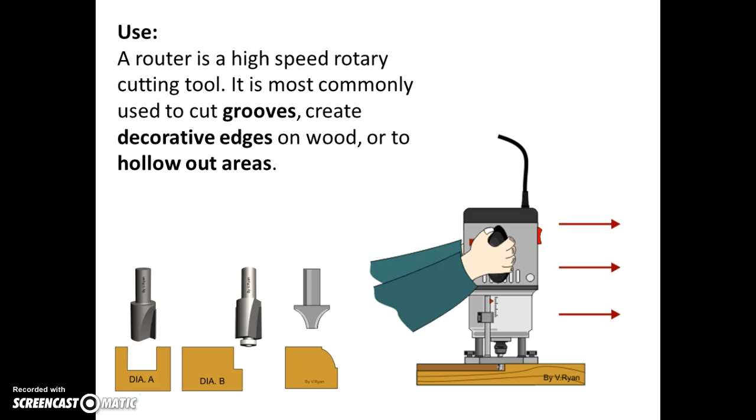Advanced tools and equipment: routers. Use. A router is a high-speed rotary cutting tool. It is most commonly used to cut grooves, create decorative edges on wood, or to hollow out areas. A router is a dangerous piece of equipment if you do not know what you are doing. As a GCSE or A-level student, you are considered old enough and mature enough to use the equipment safely.

Parts of a router. A router has two handles that should be held whenever the router is in operation. The router bit. The router uses the edge of its cutting bit, which rotates at speeds of approximately 25,000 to 30,000 rotations per minute, to produce a smooth cut. Variable speed routers can typically be adjusted to rotate at speeds of 10,000 RPM to 30,000 RPM.

Router bits come in various sizes and shapes, depending on the hardness of wood or other material to be cut, and the type of cut desired. The router bit can be raised or lowered to suit the depth of cut required.

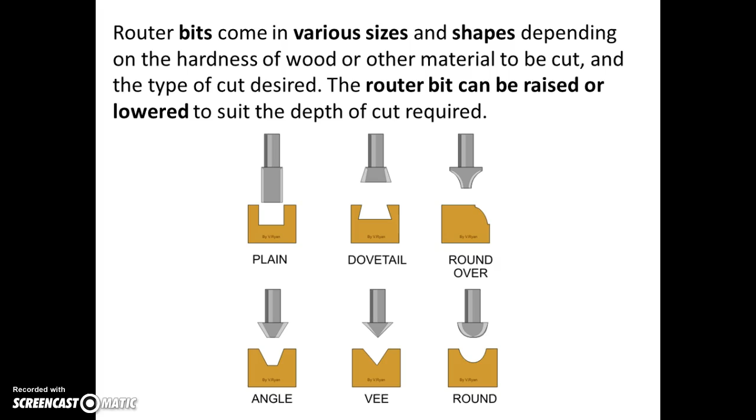Adjustable fence. The adjustable fence is used when routing in order to achieve straight cuts that are parallel to the edge of the material. The distance between the fence and the router bit is important, as this is the distance the groove will be from the edge of the material. Increasing the distance between the fence and the bit will make a groove further away from the edge.

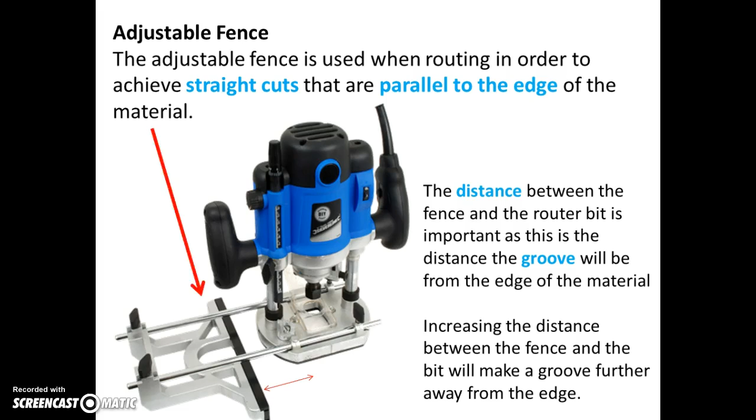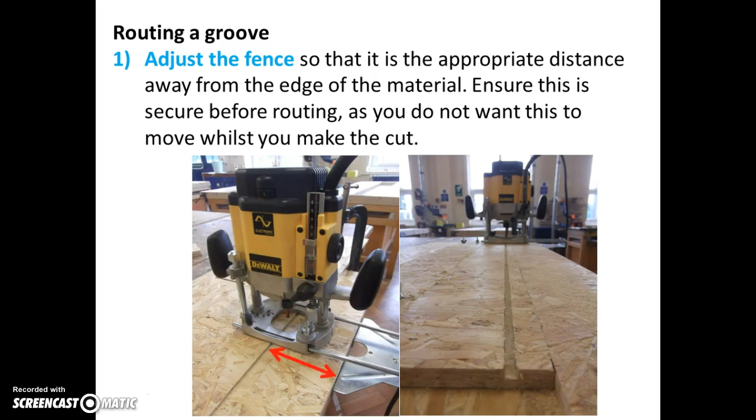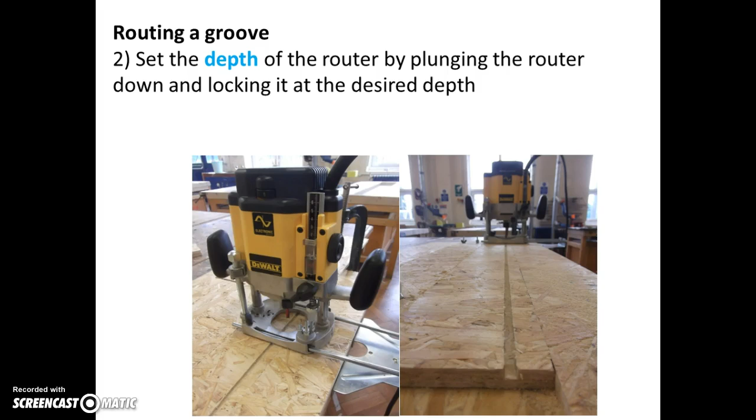How to use a router. Routing a groove. Step 1. Adjust the fence so that it is the appropriate distance away from the edge of the material. Ensure this is secure before routing, as you do not want this to move whilst you make the cut. Step 2. Set the depth of the router by plunging the router down and locking it at the desired depth. Step 3. Secure your workpiece in a jig or to a workbench so that it will not move when routing your groove.

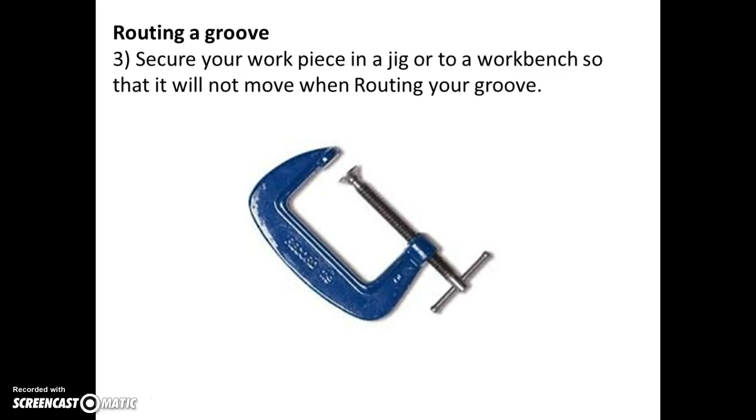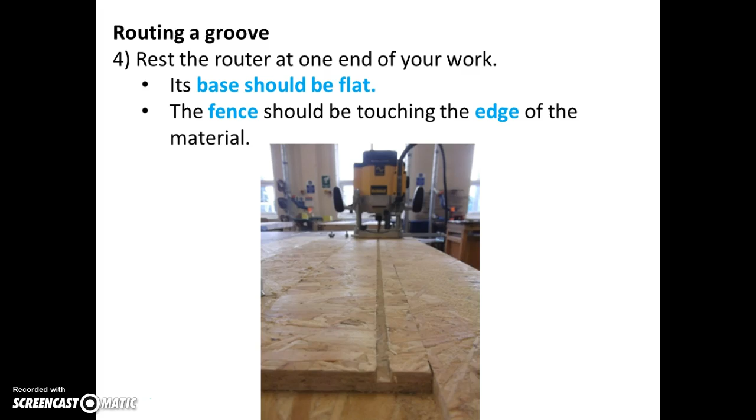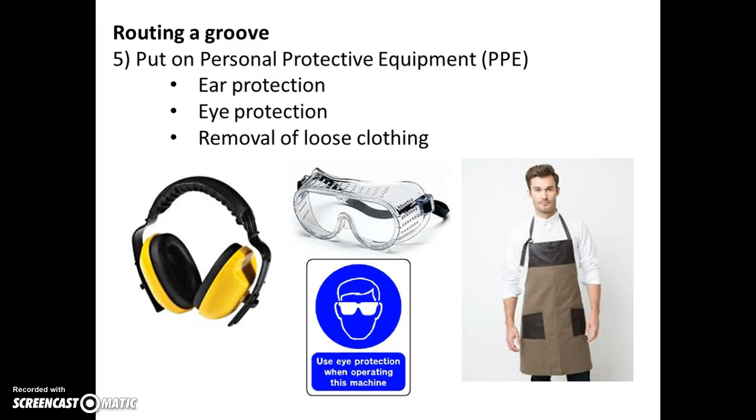Step 4. Rest the router at one end of your work. Its base should be flat and the fence should be touching the edge of the material. Step 5. Put on personal protective equipment, or PPE. Ear protection, eye protection, and removal of loose clothing should be done prior to using a router. Step 6. Plug in. Hold the router using both hands. Pass the cable over your shoulder so that it is out of the way. Move the router bit slightly away from your work before switching on the router to allow the router bit to get up to the required speed before cutting.

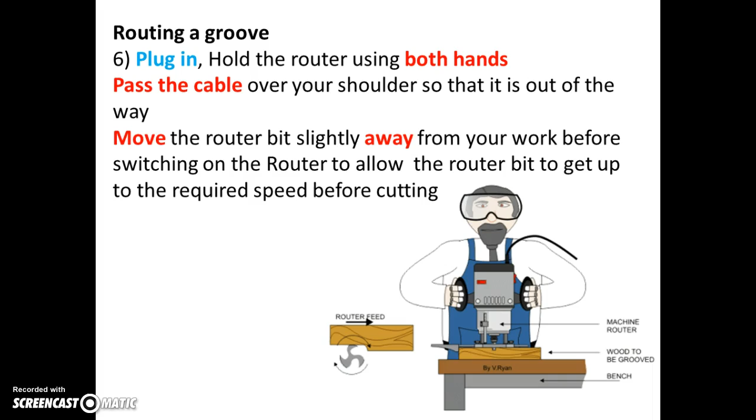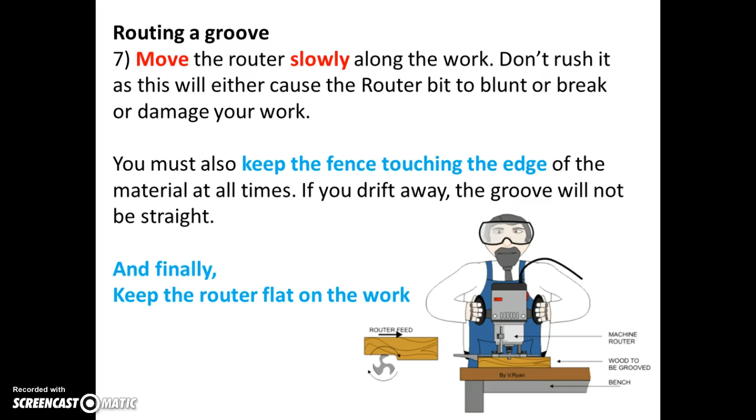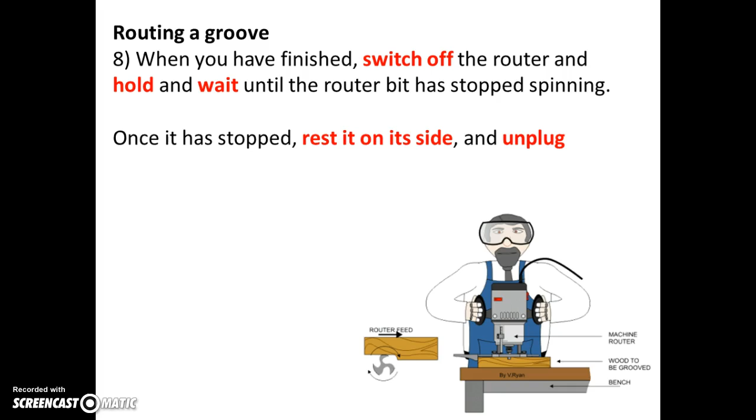Step 7. Move the router slowly along the work. Don't rush it, as this will either cause the router bit to blunt or break or damage your work. You must also keep the fence touching the edge of the material at all times. If you drift away, the groove will not be straight. And finally, keep the router flat on the work. Step 8. When you're finished, switch off the router and hold and wait until the router bit has stopped spinning. Once it has stopped, rest it on its side and unplug.

Just to recap, the router cable should be passed over the shoulder so it is out of the way. The router is operated with both hands. Eye and ear protection are required at all times. Loose clothing and hair must be tied back or removed. 100% focus is required when using a router. Start up the router slightly away from the work so it can get up to the required operating speed.

Now, in order for you to use the router, you must demonstrate your understanding. The router task. What I'd like you to do is answer the questions on the sheet provided. If you can't remember any of the answers, you should replay this video to find out what the answer is, or try and skip to the certain sections and then answer the questions asked.